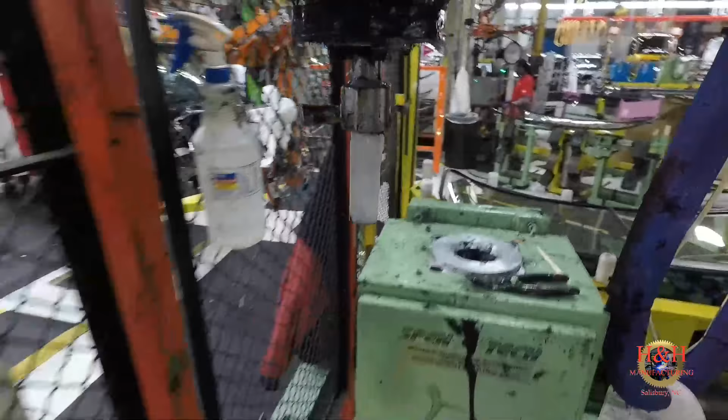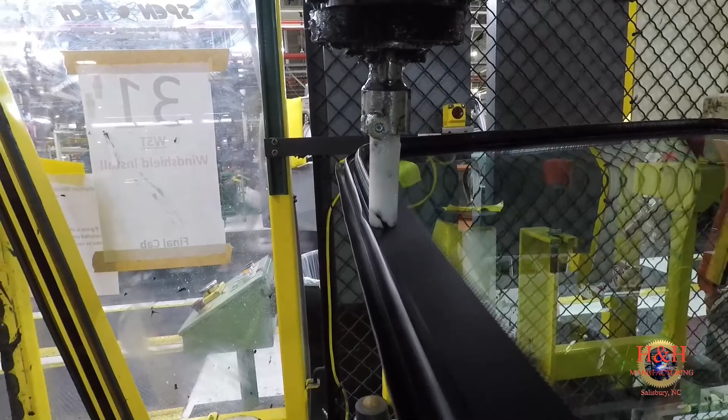And it goes around the glass. I have a short video here I can show you. It goes around the glass and shoots a specific size bead, and sometimes that bead needs to change based on the condition of the glue, the viscosity, and so on. But the engineers can change that, so when they do, the easiest way—besides just telling a guy—is if you have stuff documented, as anything should be, you can just change these parameters.

So what we're going to do is crank up Fusion 360, and this is what we're going to draw right here, not including the Freightliner logo. That'll be another video live stream all by itself, because I don't remember how I did it.

I don't know if I brought in an SVG, an STL, or even a DXF—I don't remember how I did it. More than likely I brought in a DXF and projected that onto the surface, or I did it the other way and extruded it up through the bottom. I don't remember. It helps if you could see it.

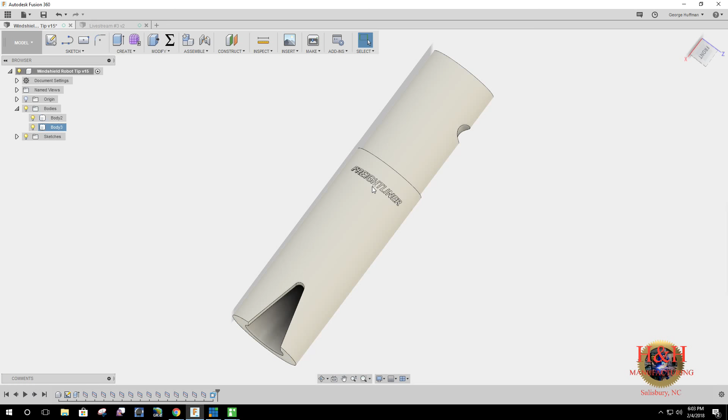So here, this is what we're going to model: the glue nozzle, minus the Freightliner logo, of course. But it's just a glue nozzle.

We're going to use the parameter settings in Fusion 360—the table setup that has all measurements in it. So instead of using a dimension as an expression, instead of dimensioning the drawing, we're going to use expressions to do it. Instead of naming a diameter or length 3.25, we'll type in the dimension as overall length, and it'll always reference this table.

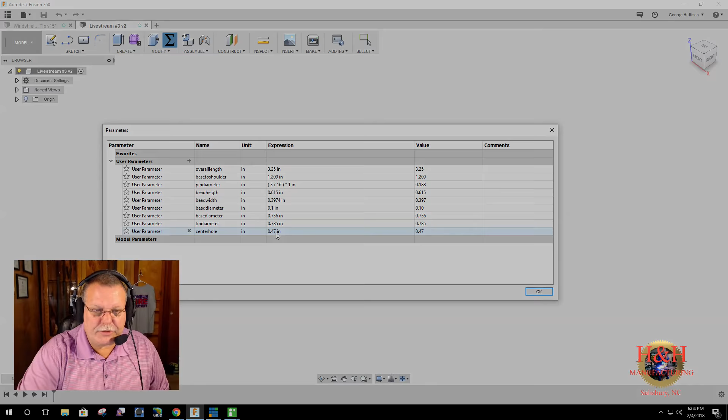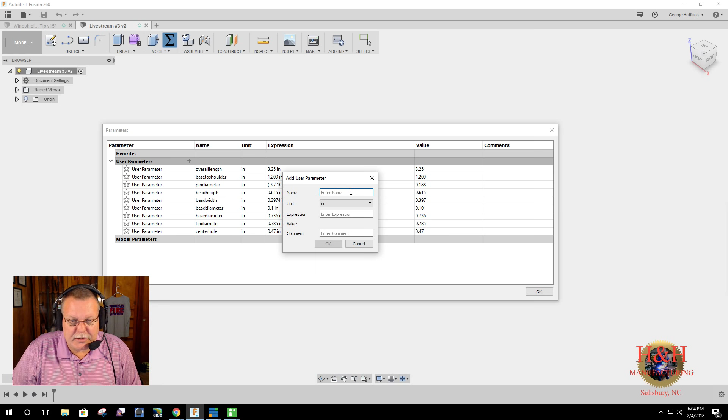I went and printed out the drawing, so I have all my dimensions except for one, and I'll add in this parameter. The parameter we need is the distance from the base of it to the center of the pin. So what I'm going to put in here is base to center of pin—I keep it pretty simple. That measurement, just done with calipers, is 0.472. Now I have all my dimensions and parameters set.

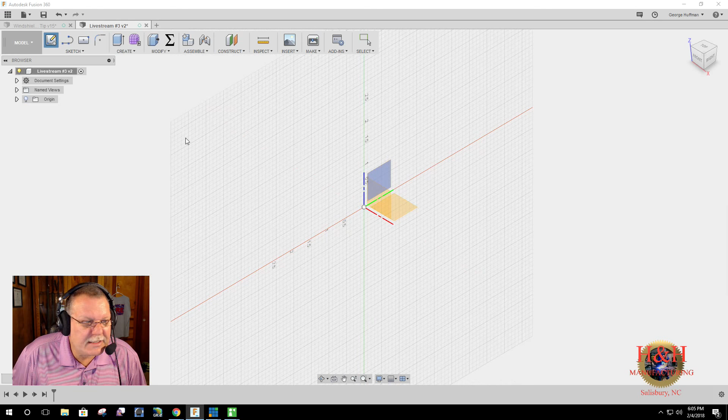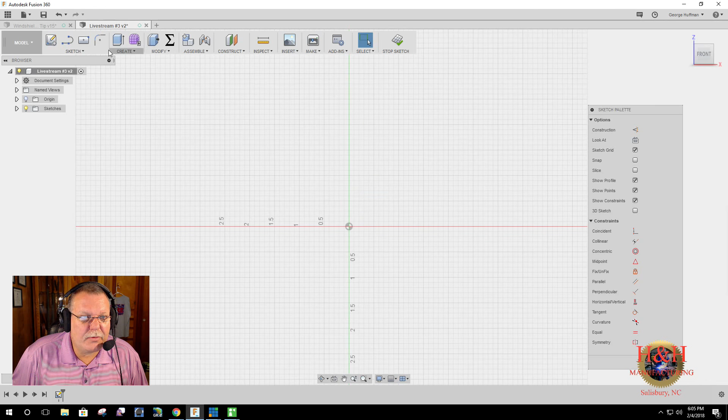So we can go ahead and start sketching. We're going to start a sketch. The way I normally do it, since it has these cutouts, is I usually start with a square, and we'll dimension that square to the size of the biggest diameter—in this case 0.785—but we're not going to use that. We'll use the tip diameter, which is this side here; this is the base side, this is the tip size. So we'll create a sketch, choose a plane, and then draw a rectangle.

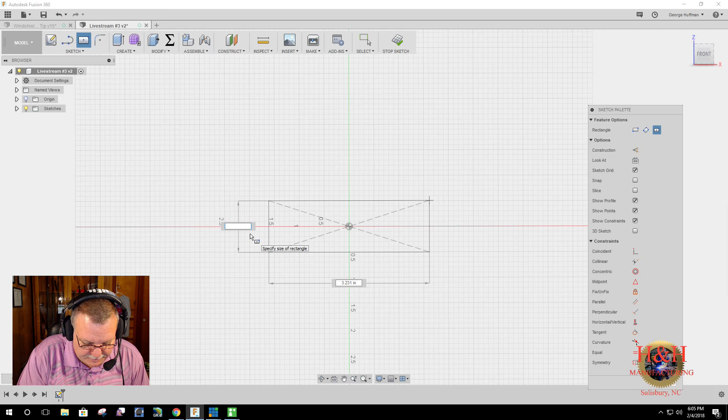Let me get my computer to work in here. We're going to draw a rectangle, and the dimension of it is 0.785, like I said, but what we're going to use is the tip diameter. So as I start typing in tip, anything that had the diameter measurement would pop up in this box down here. So I want it to be the tip diameter, so I just hit enter.

And then, of course, I need to dimension this, so I'll hit D on the keyboard for dimension. And instead of putting the 3.25, we know the overall length, so I hit overall length and hit enter. So that defined that part of the sketch.

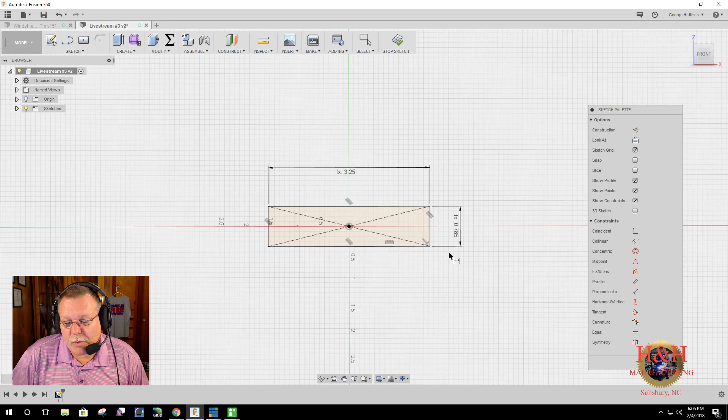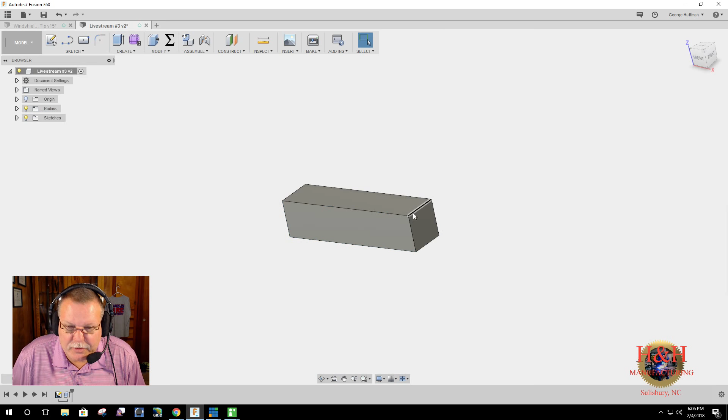So we can go ahead and stop the sketch here, or we can keep on. You know what? I'm going to stop the sketch here. We're going to press pull it, which is make it a solid. We're going to choose our face, and we're going to give it a depth. And I don't want 1. Again, I'm going to use the user parameter settings, and I'm going to type in the tip diameter, hit enter. So now I have a square box, or a rectangle box, for lack of anything else.

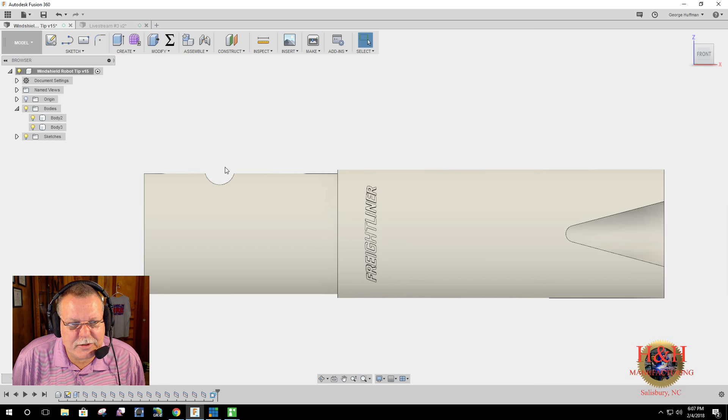And that represents the overall shape, or the overall size of it. So now I can go ahead and draw these parts here. Let me get this one so we're about the same looking. We'll draw this part into it, and the bead profile into it. This is the locking pin. So when it goes up into the collar that's built onto the robot, we put it in, and it's got an 1/8 or 3/16 locking pin. Not sure which size it is. This measures 3/16, but I'm sure there's some clearances for that pin to slide in.

So we'll start another sketch. Whoops, go back to the one we're drawing on. Start another sketch, and we're going to do it on this plane. So we can go ahead and draw that half round or the circle where the locking pin goes, but we got to remember that this is a smaller diameter up here on the top.

So what we need to do is define that diameter first, and we can make a couple construction lines that would just help us get where this pin needs to go. So I'm just going to draw a couple quick construction lines, and the easiest way for me to do it is you go down here, you see where you have your midpoint toggle on, and come out here, and we drew a line. I'm just going to hit OK, and then I'm randomly going to choose another spot up here and do the same thing and hit OK.

Now I'm going to escape out of that, and I'm going to highlight both of these, and I'm going to hit construction over here on my sketch palette. So they turned a dotted line. So those are just construction lines. Now I can dimension it.

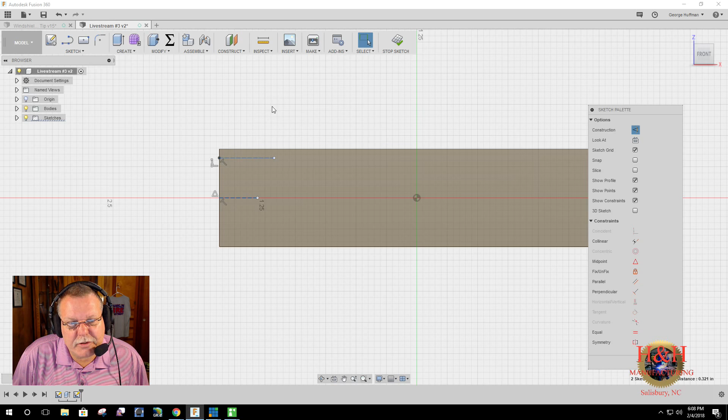So I'm going to hit D for dimension, and I'm going to dimension this right here. Of course, it never works when I want it to work. And there it's telling me that I placed it 0.321, but I need it to go to that parametric, or the user parameter that I set in there. And in this case, it would be half of the base diameter. So if I type in base, it's already there, and I need it to be half, so I'm just going to divide it by 2. And then it spaces it out exactly where I want it.

So now I'm going to draw a center circle here, anywhere on this line. And the dimension for that is pin diameter. Yeah, pin diameter. So I just started typing P, and it's already there. So pin diameter, and I hit enter. So it's 0.188 or 0.1875.

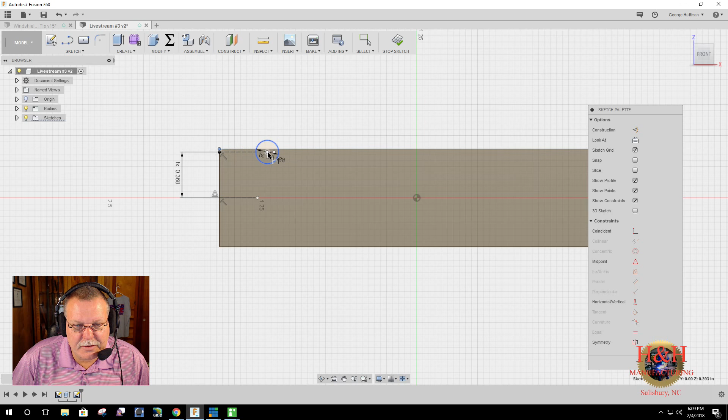Now I need to dimension it from the end to the center. So I hit again D for dimension, and I go from the end to the center, and I come up, and that is base to center pin. So you just click that, and now that's dimensioned. We don't need to, we can trim that off if it doesn't look good to you, but I'm going to leave it there for now. So now we've got where the pin goes.

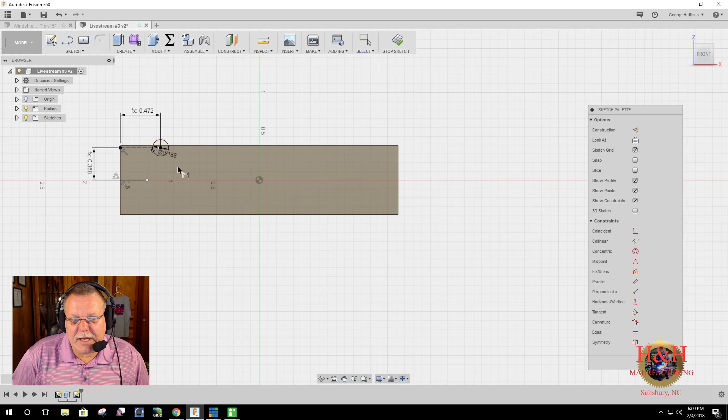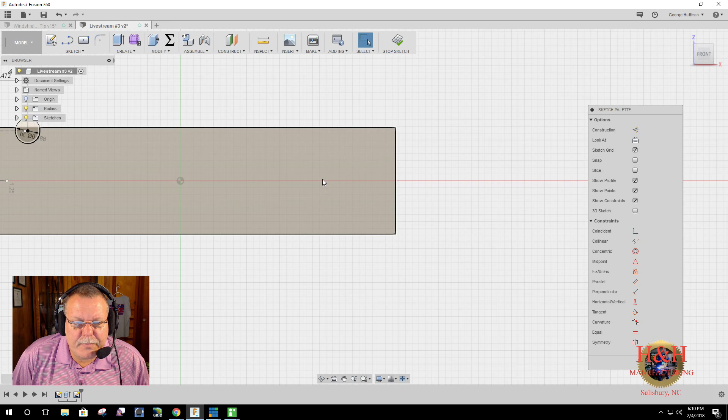So we'll just leave that alone, and we'll come over here to this side. Now I'm going to place the bead profile. So again, I need a couple construction lines, or at least one, or might not need any. We'll try it without any, let's see how it goes. Since I drew a center rectangle, I have this guideline here, and I can catch off here. So I'm going to draw a center circle, and if I hover down, you see I caught the midpoint. And if you just scale back, you see the blue dotted line.

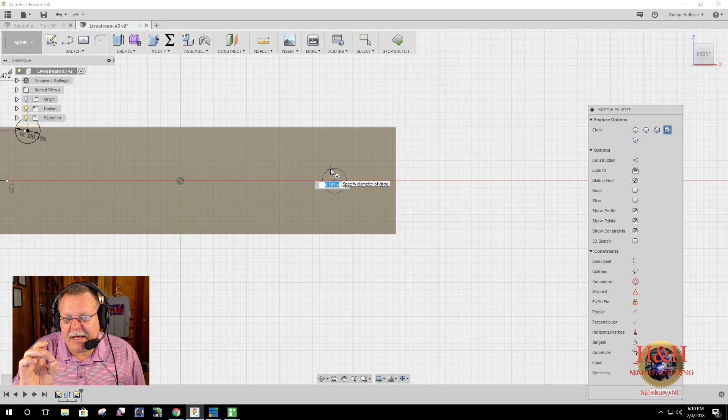And that just lets me know that I'm still coincident to the midpoint. So now that diameter is the bead diameter, so I just type in bead diameter and hit enter.

Hit enter. Now I need a couple lines on here, let's zoom in so you can see. A couple lines here so I can get the size of the bead. Hard to figure out what to call some of these things sometimes. So I'm going to hit L here, or go up and hit the line tool on my sketch palette, and just draw it anywhere, going around the circle so you can see.

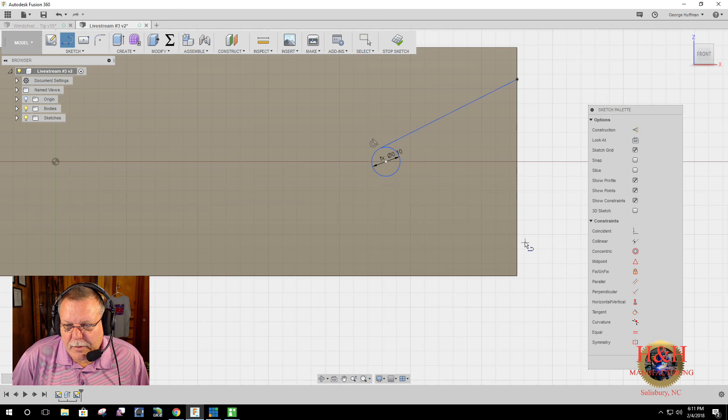Where the tangent constraint comes in - you can do that, or you can come back later and put a tangent constraint in. I'm going to draw this one weird, just so we can show what I'm talking about. So now I need to dimension this also.

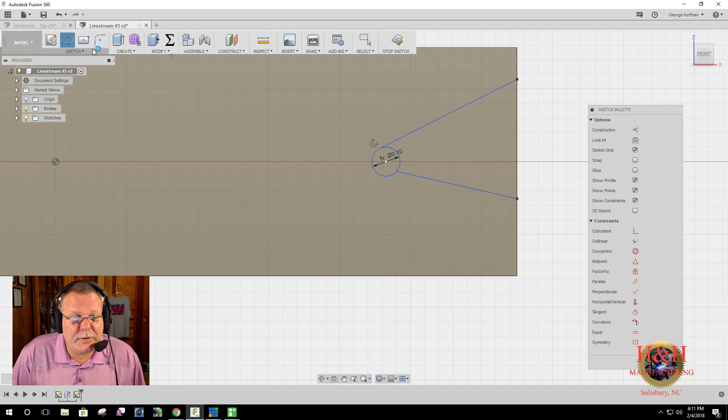So to do that, I'm going to draw just a little line in here to help out with some of my dimensions, the way I like to do them. Whether this is right or wrong, this is the way I like to do it. So I'm going to draw a little construction line right here, and that's OK.

I'm going to escape out of that, highlight that line, and hit construction here. So it turned it dotted. Now I can go ahead and dimension all these features, or all these features.

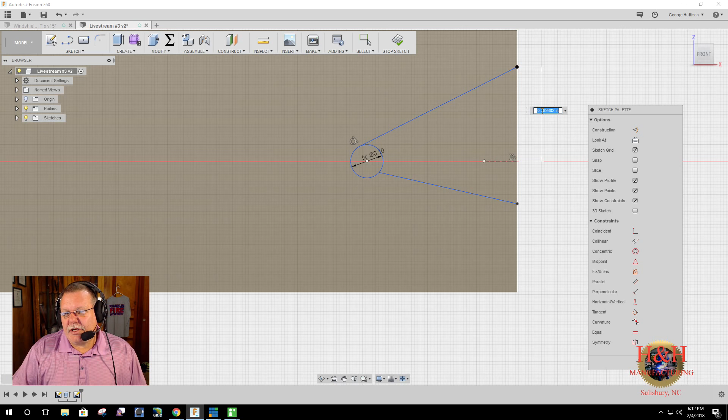So I hit D for dimension, again hit the right letter on the keyboard, from here to here. And that dimension is going to be half of the, what did we call it, the bead width. So we'll do bead - we'll see what I named it. Bead height, bead width. So it's bead width divided by 2.

Oops, and I need this to stay up here, so I needed to take that tangent constraint out of there. Let's back up here and get rid of that tangent constraint.

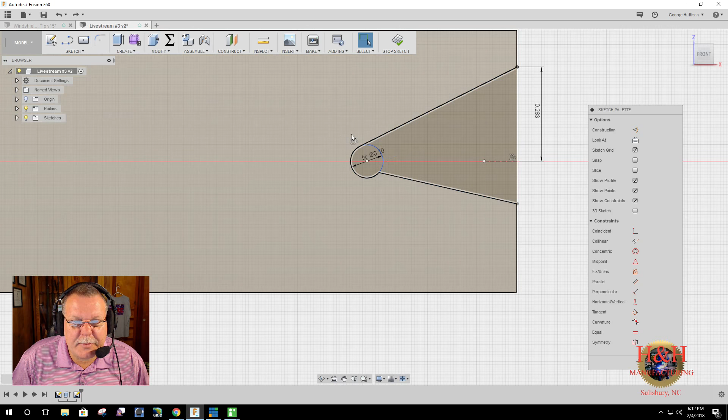So now we're going to dimension that the bead width divided by 2. That still did it - that's weird. I wonder if it'll let me do a coincident. Where's that sucker at? Horizontal, vertical.

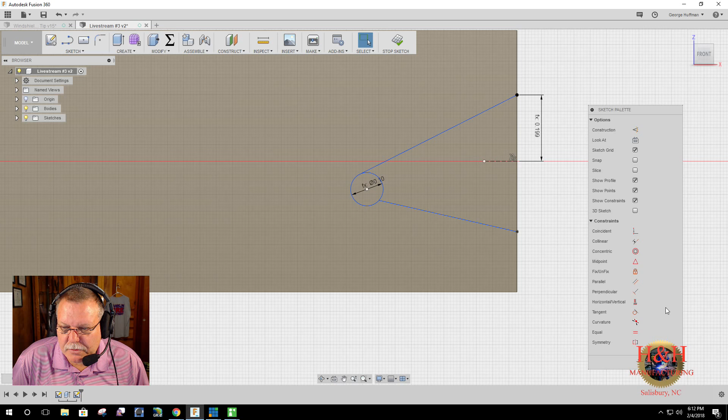Right here to right here - there we go, that'll work. That just lined up these two dots here with a horizontal, vertical constraint. So now it shouldn't move.

And then we need to dimension the bead width, which is right here. And instead of putting in a measurement, I'm just going to put bead width. But then you see how the profile is - I need a tangent constraint here, and I'd probably need to put a tangent constraint here too.

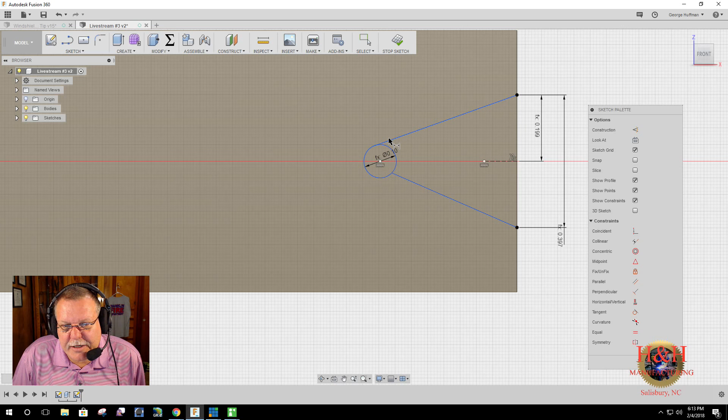So down here in the sketch palette, under constraints, I'm going to hit tangent. I'm going to say this line to this circle's tangent, and this line to this circle's tangent. So now it's not locked down, because I could draw a line here and that would lock it down, but we have these dimensions in it, so we'll just leave it like that.

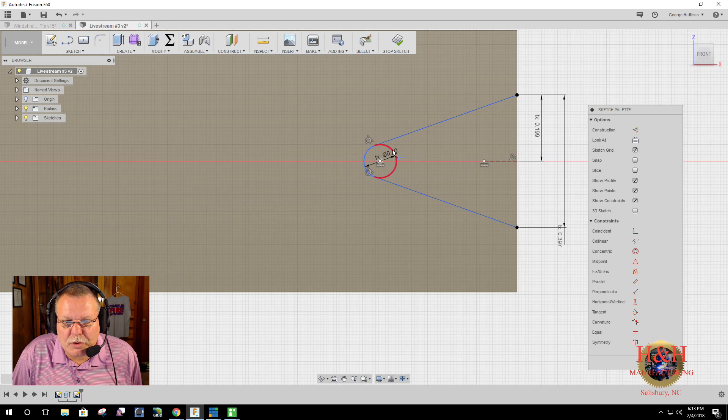I'm going to trim the excess off here, so that's pretty much got that part of it done. You know what, let's draw this line in here so then I know it should turn everything black. Or it didn't - oh well. Alright, what else do we got to do here?

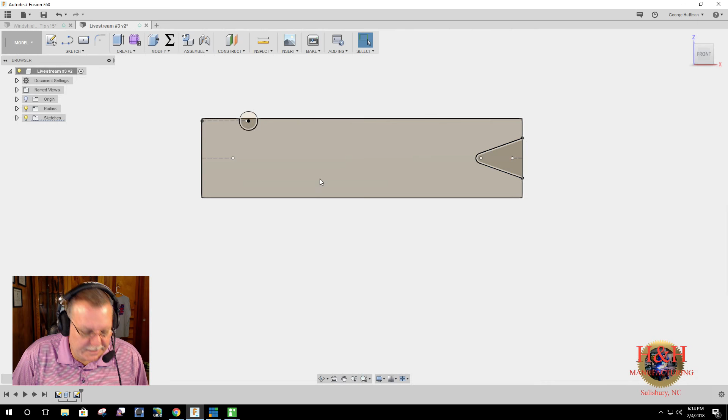I think that's it, so we're going to stop that sketch, and I'm going to rotate this thing around. And what we're going to do next is draw the radius, or the diameters here. So we have the big diameter on the tip side, we have the small diameter on the base side, and then we have the center diameter through the hole.

So I'm going to draw on this plane right here. Let's create a new sketch on this plane. And the easiest way to draw a circle - I'm going to turn this other sketch off so we don't see it - is, let's see, sketch 2.

I'll draw a tangent circle. This box is the largest diameter that I use. So I'll draw a tangent circle, go down, pick circle, 3-point tangent, and I'll pick those 3 sides of the box.

It'll snap to the tangent, and we should be good. So no matter what size box we change, no matter what we change in our initial parameter settings, since we set the box diameter at the tip diameter, it'll always change too. We're going to look at it, and it's set at 0.785, so no need to dimension it.

Now that I drew a tangent circle, I have a center point here, so it's easier to draw a circle now. Let's make this circle the center hole. Then we need one more, which is that little shoulder. So we'll type C again, and is this tip or base? It's base diameter, so we'll type that in and hit enter.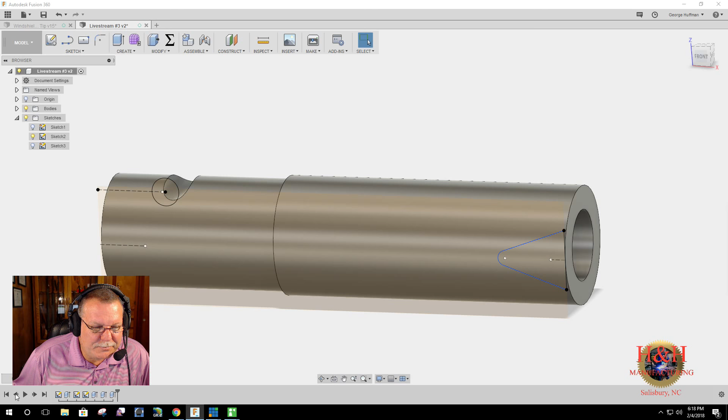So we're going to back up. Alright, there we go. Back up one more.

What I did was I switched it around to this side, and we drew another sketch. Let me turn that sketch on, and we'll go ahead and edit the sketch so you can see. I drew a 3-tangent circle using the three sides of the box as my tangent points.

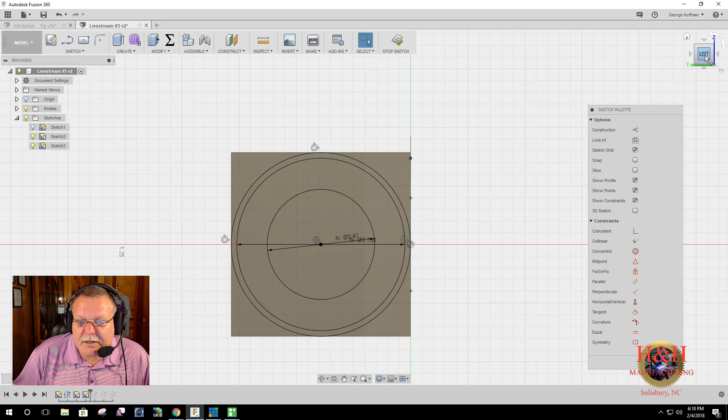Since I didn't put any dimensions on that outside circle, it'll always change with that box. That allows me to have a center point that I can draw these other two circles from. So these other two circles are dimensioned based on the user parameters I put in at the very beginning.

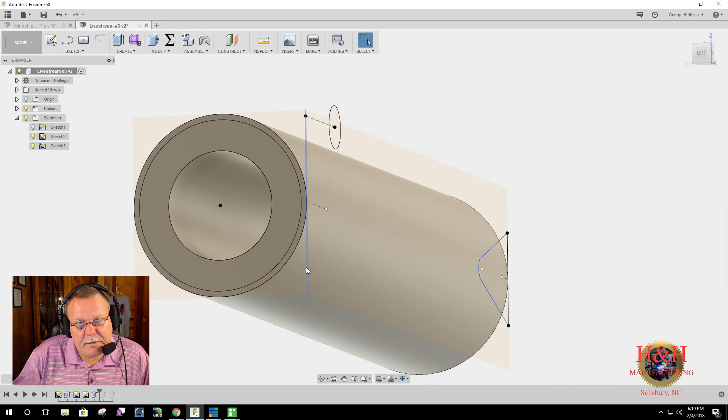After I got done with that, we press pulled, stop sketch. Then we press pulled - you know what, let's just go back here and I'll do it again, it doesn't take that much to figure out. We're just going to erase these three press pulls here. So delete, delete, delete. Alright, now we're back to our drawing.

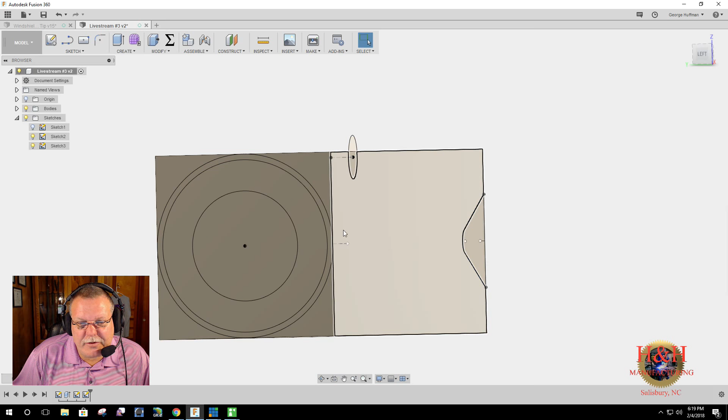Here's a sketch on the front plane, and here's a sketch on the side plane. We need to get rid of this material and this material to create the hole and make the thing round. The easiest way is you hit Q, then highlight the 3 parts, or 5 parts in this case. Since we're cutting it completely away, you just drag it through the profile and hit cut, and it's done.

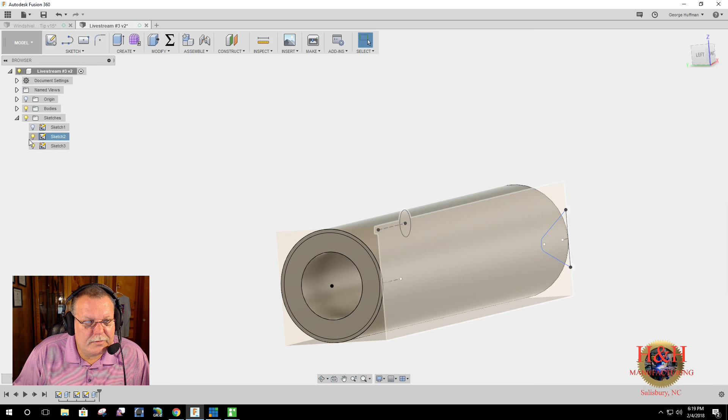Now let me turn this sketch off. We need to put the shoulder part in there, and it's another cut operation, but it's a dimension cut. So I pull it back a little bit. Since it says it's negative, I'm going to put negative base to shoulder, and it automatically does that part for me. So now we have most of the part done.

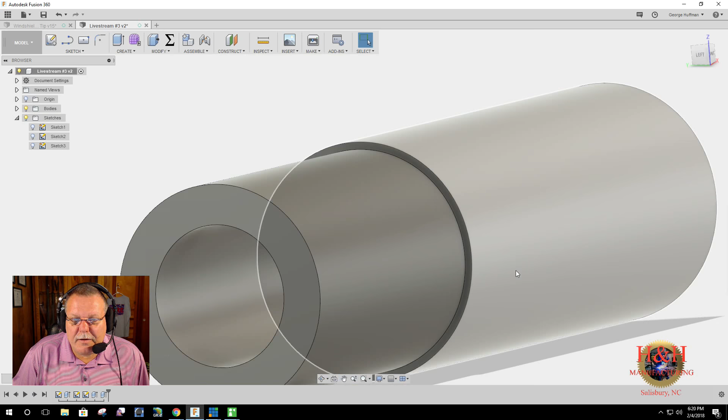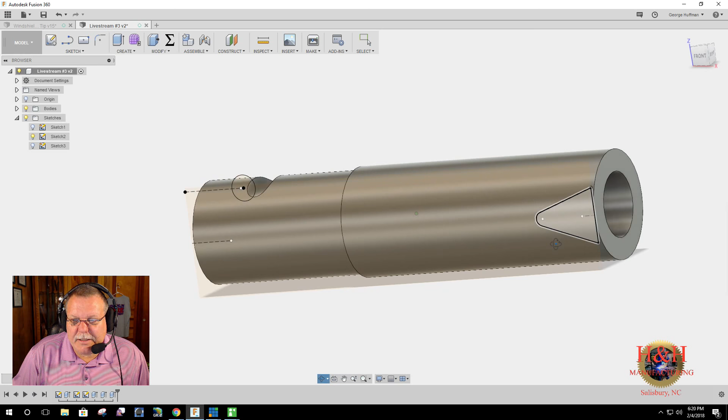We need to put the cuts through for the bead profile and for the locking pin. To do that, this top one's a cut operation. It's pretty simple: you hit Q and just drag it through, and now you've cut your hole for your pin diameter. Now we need to do the profile for the bead.

Again, we're going to hit Q for press pull, except this time I'm only going to go half, not all the way through. In case this thing ever gets dimensioned big or small, I'm going to do it by a formula, so I'm going to put tip diameter divided by 2, which should take me to the middle of the part.

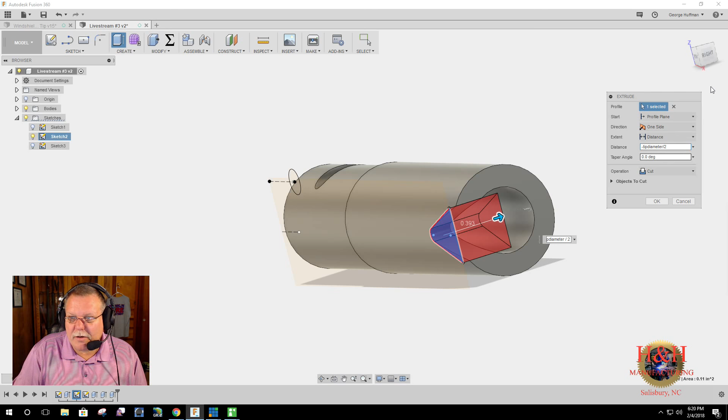If I go here you can see it'll always be in the middle of the part. No matter if we make these things 3 inches or 5 inches, it'll always cut to the middle of the tip diameter. So hit OK, and then turn off that sketch, and there we go.

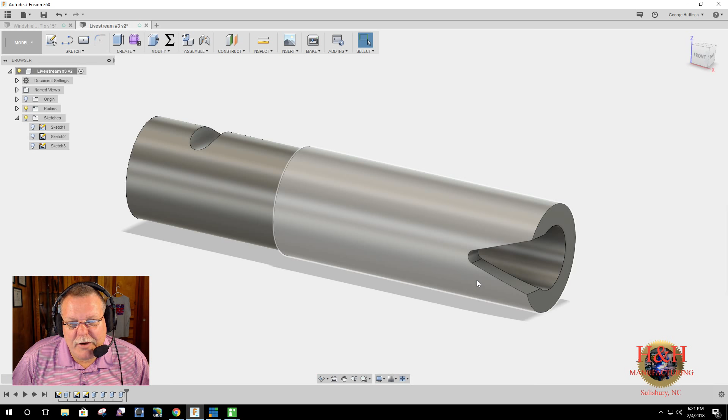One glue tip nozzle ready to go, ready to be machined, ready to be printed, ready however you want to make it. The only other thing I would probably do is put a short little fillet in here, just so it's not got that sharp edge.

You can define this in your radiuses too. You could put like a 25 thousandths radius in there, which is probably plenty, and that would radius that. You could radius the whole thing if you wanted to. So that's pretty much it.

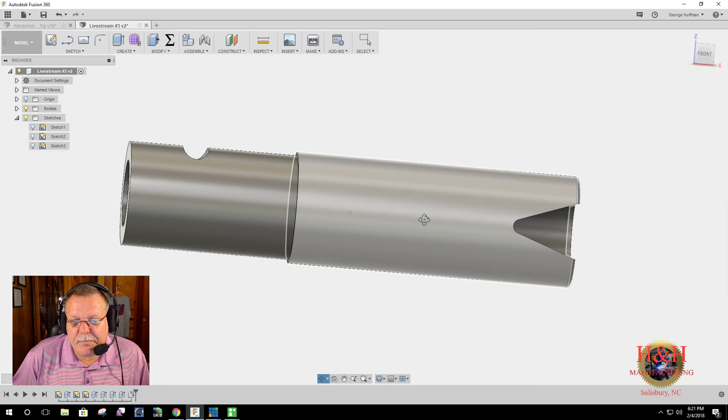Let me spin it that way so you can see. Let me rotate a little bit. I'll show you what I'm talking about with these user parameters.

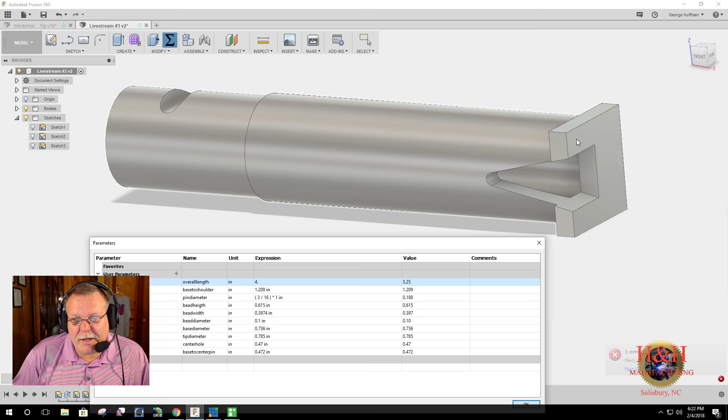If you wanted to change the overall length of it, like say to 4 inches, just hit 4 and enter. See, since we didn't do that cut all the way through, that might be one thing we can go back and fix.

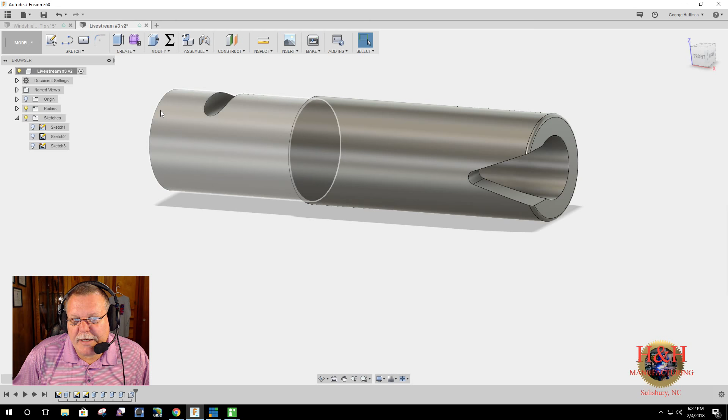If we went back to this very first extrusion here, one of these extrusions, we need to, instead of pulling it through, make it an operation tied back to that formula, so that won't happen. You could do like overall length plus 5, or overall length plus a half an inch or something like that, so that cut operation will always go through. That's why that did that.

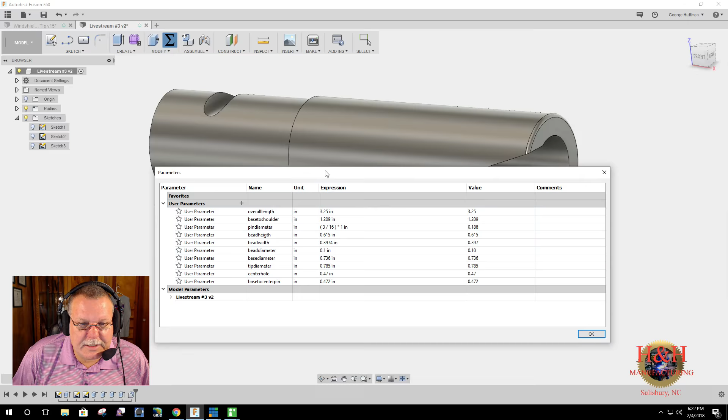Let's change this bead profile. Say the engineers want this thing 3/4 of an inch up here. So the tip height, the bead height, instead of being 0.615, say they want it to be 3/4. You just hit that and it changes the bead height. Or if they want to change the bead width to 0.5, it changes the bead width to 0.5.

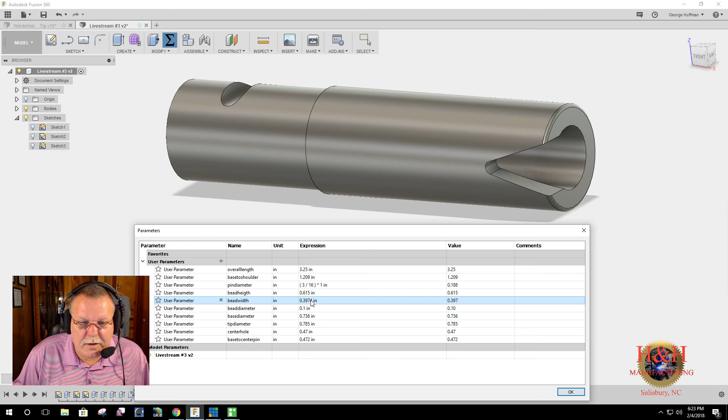We might not have did that 0.3974 dimension. Let's go back and look at this sketch right here. Let me close this. We're going to edit this sketch because that didn't change when I did it. Oh yeah, see, I didn't put the dimension for the bead width, so that's why that didn't change.

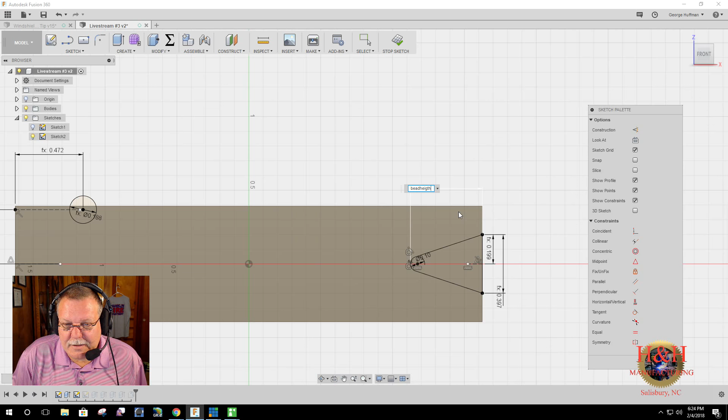So hit D for dimension. This is what's good about using modeling software like this: you can go back in your timeline history down here and fix anything you see. So here to the bead height, which is the arc tangent of that right there, we need to make that the bead height. Hit enter. Alright, now we're good to go.

So we'll go back down here. Come on now, work with me here. Live, doing stuff live, and this is what happens.

Alright, parameter table's up. Now if I change this to 0.750, it changes to 0.750. If I want a 1/2 inch bead at the bottom, it makes it a 1/2 inch bead at the bottom. If I want to change the top radius to 1/4, it changes it to 1/4.

And anything you want to change, so let's change everything back: 0.615, the bead width was 0.3974, and the bead radius is 0.1. That's how they're made right now at work. But you see how easy it is to change.

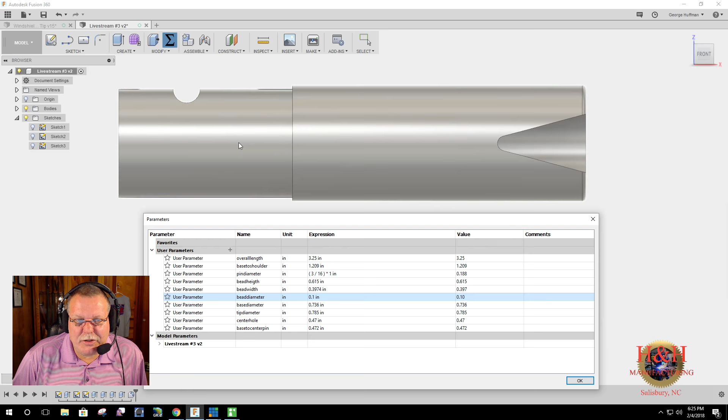Anything in the model environment you can change using these parameter settings, as long as you've dimensioned the parameters. And you could go in at any time - we'll go back in here. Let me close this out and edit the sketch.

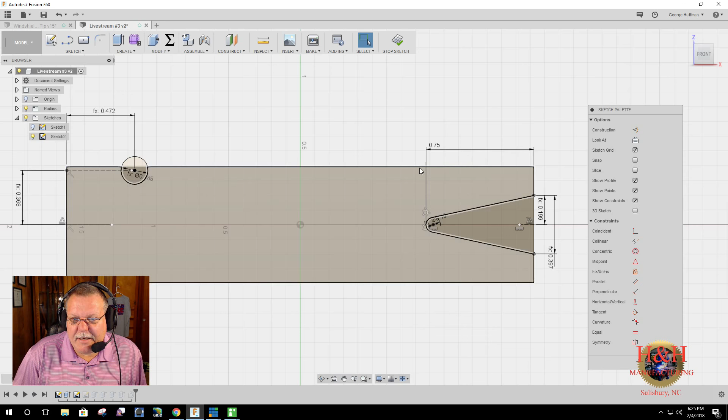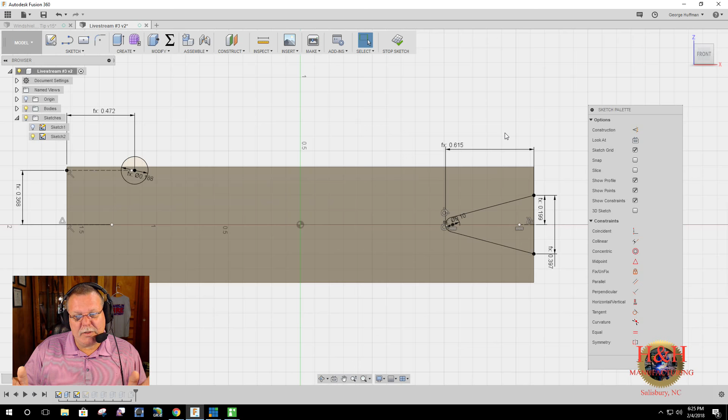If you didn't want to relate that, you could always put 750 in there, but it would always stay that. If you've already made a drawing and dimensioned it this way, putting all the dimensions in, and then you say, shoot, I should have made a table—well, make your table, and when you come back here you can do the same thing. You put bead height, or whatever you've named that dimension. So it's a very easy way to change drawings once you've drawn it.

We use these kinds of nozzles throughout the plant. This one comes from the windshield area. There's one where they put adhesive on a roof cap, and another where they put it on metal-to-metal surfaces in the cabin white area. I can't even name all the places—there's quite a few. But this one drawing could serve for the whole thing. They're all basically the same; you just change the parameters, and then print or machine them however you want.

So that was our drawing lesson for today. We'll see what next week has in store for us.

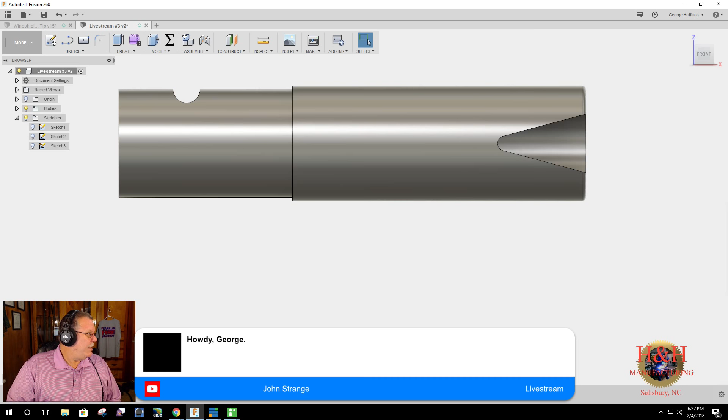I had an email with Adam Booth last week, I believe. I'm sure anybody watching this channel is following Adam Booth. He got another viewer to send in that part he was needing for the G&E shaper, the one we modeled two weeks ago, and he got back in touch with me. That one won't fit his, so we need to change the drawing a little bit. But I believe he's going to go ahead and machine it with the shaper—so the shaper he bought is going to make a part he needs for his shaper, which is pretty cool. I know he sent that drawing to Mr. Pete, or Tubalcain, on YouTube, and I don't know if he's going to print a 3D copy of the one I drew or what exactly. But I sent a good drawing to Adam, and he should be getting back to me, and we'll get the measurements down pat before we do that.

So anyway, I think that's it for today.

John, I know you've been watching the Sidney Lathe stuff. Work has been hectic the last couple of weeks, so we've been wide open trying to figure out—we're getting ready to crank up another shift, and we're trying to figure out where people are going and all that. So it's been wide open.

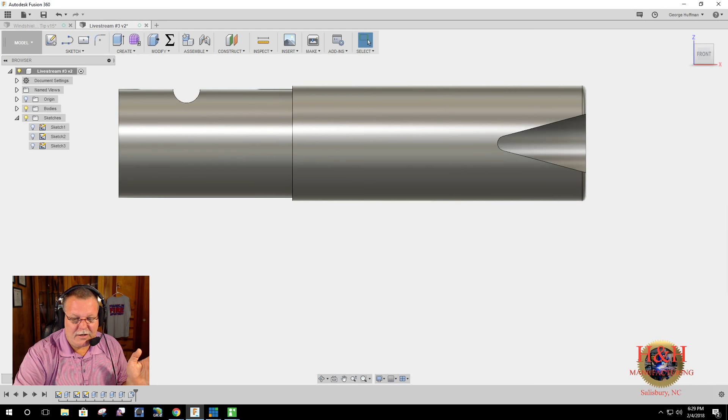But I plan to get back on the Sidney Lathe pretty quick. Like I said, all the parts are off of it. I have to make some troughs—I couldn't find a plastic bin big enough to get the apron, or the saddle, in. So what I'm going to do is get some 2x8s or 2x10s, screw them together, and line it with plastic, because I don't want to use 100 gallons of purple power and waste all that money. We're going to put that stuff in there, get it soaking in the purple power, and then we'll get to cleaning up on it. It's getting there—I can't wait to get it back together. I have to get with American Rotary, or get a phase converter. I don't think Duke Power is going to run that stuff out there cheaper than I can get a phase converter for my 3-phase power. So we'll get there, we'll get there.